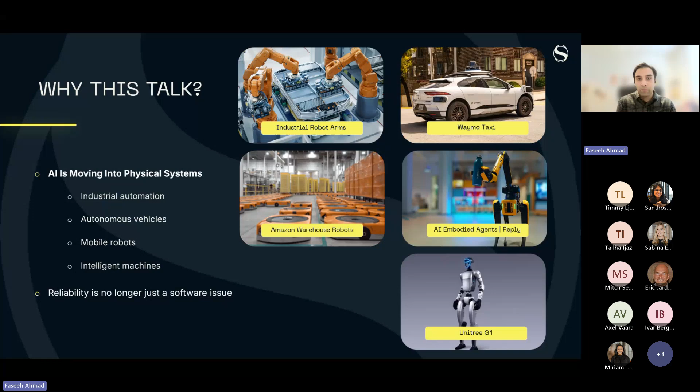Before that, let's try to understand what actually changes when you go from traditional automation toward the AI-driven automation we have right now or are trying to achieve right now.

Before AI, you generally have a structure with three modules. First is inputs, which can be sensors or whatever the user is providing based on task specifications. Then you have a controller, most commonly a PLC controller, that takes these inputs and decides, based on rules defined by the user, to generate control commands. These control commands are then used to control actuators, which could be motors, valves, relays, conveyors, etc. You name it, you're basically doing it.

In most cases you also have a feedback system, which tells you what's happening, and then you can have a closed loop system. The beauty of this system is its deterministic and rule-based control flow—you know exactly what's going in, what's happening, and how you're deciding.

This predictable behavior has an interesting effect: if any failure or edge case happens, you can research it, analyze it, and devise a strategy or a clear validation process, in the form of test scenarios or whatever you want to do. Super nice. But one drawback of this kind of architecture is limited flexibility.

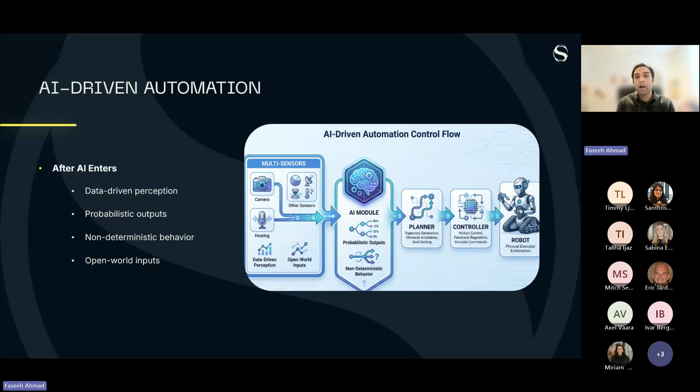And here a lot of things can actually go wrong. For example, there can be a block that's blocking the hole, so you cannot insert the peg in the hole. Or when you try to grasp the peg and insert it in the hole, it actually drops off your hand.

These are small issues. And if your perception system doesn't detect these, you will have problems, because first, you won't be able to achieve the goal you want reliably. Second, you can also endanger the environment you're working in.

One thing I need to mention: these failures are not planning level failures, they're execution level failures. What I mean is that your strategy to solve a particular task doesn't have information on how to deal with these failures, because they only arise when you're actually executing the task. For instance, misplacement of a tool, wrong grasp, or equipment damage.

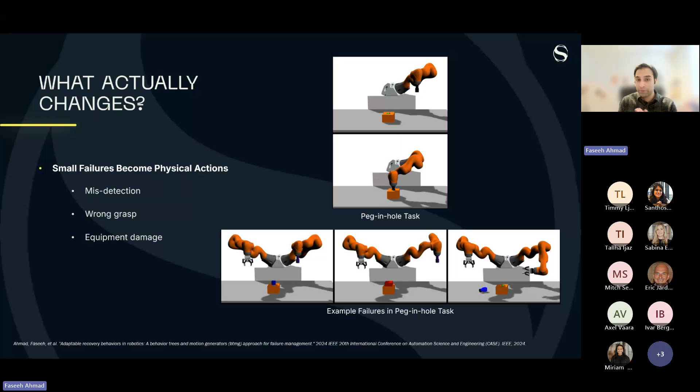And when this happens, you have failures. And failures can be messy. They can have different forms, different shapes, and different results.

So you have partial failures, where you try to grasp the peg, you manage to do that, but since the grasp parameters were not correct, when you were trying to move the peg, it actually falls off your hand, and it can have cascading effects as well.

To understand that, imagine you have a task you want to solve in 10 different steps. But in step number 3, you actually encounter a problem which your system doesn't understand, because the system never imagined this would be a problem.

And the effects of those problems actually arise when you're at, let's say, step number 6 or step number 8. And those effects can carry on to the next parts of the solution or the problem you're solving during the process.

And another issue with these failures is, since it's a very complex system, you have hardware as well as software. In almost all cases, you're not very sure what the clear root cause is.

So either you have wrong parameters, is the peg too slippery, is the grasp force too small, is the hole misplaced, is the lighting condition correct? All these things matter, and they're actually part of why a failure happens. It's not always easy to find out which one is the exact cause.

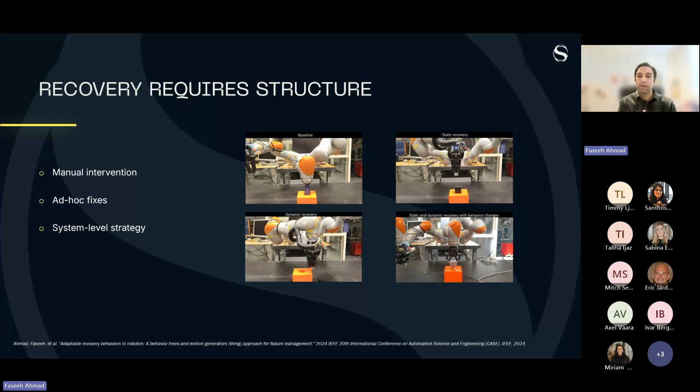And one thing you'll probably notice here is that this is only true if you know such a failure will happen—so kind of like expected failures or known failures.

And now I will show you why AI is super powerful and how we can use it in simplest terms to actually address unknown failures. Here, I will show you a video, which is basically a test run on the ABB YuMi robot.

Here you see this control strategy, which is a behavior tree. To understand it simply, it tells how the robot should solve a problem. Then at the bottom you see some text - this is essentially AI telling what if the failure has happened, what kind of failure it is, and how we resolve this on the fly by fixing the control strategy.

The task we are trying to solve is placing same colored objects into same colored bins. In this instance, the red object is acting as an obstacle because there is no colored bin like that. So the AI understands and devises a solution, fixing the strategy by removing the red object and continuing the execution.

Then in this case, we tried to place the blue object inside the green one because that was the goal. While doing so, the robot actually failed for unknown reasons, which in this case is a human intervening. The AI understands that situation, and now it will try to do the same action again to see if it succeeds.

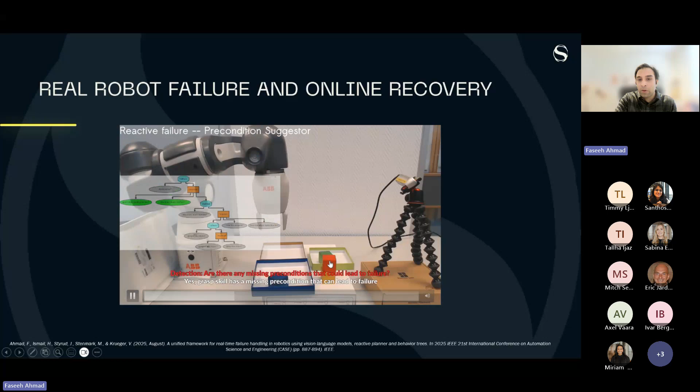Here something interesting happens - the red object is blocking the hole in which the blue object is supposed to be placed, but we cannot pick the red object because the gripper affordance isn't enough. Now the AI needs to understand this and provide a solution for removing this object. In this case, it tells you that you need to do a push action - that's what it's doing.

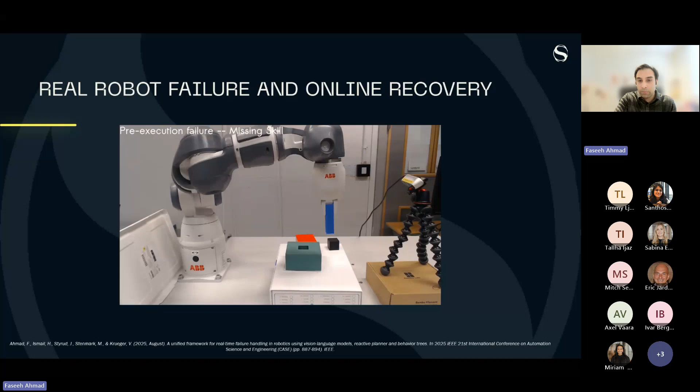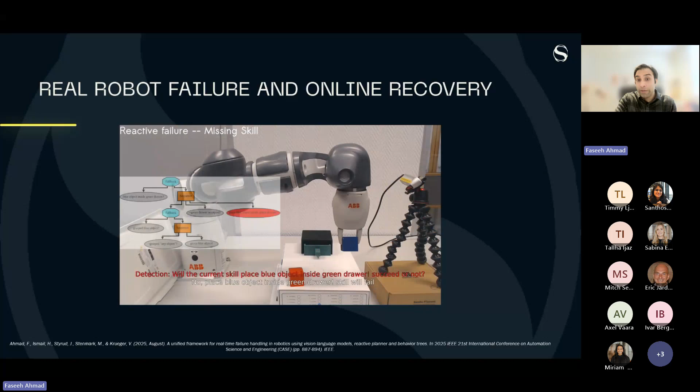And then you do the normal execution. In this case, the goal is to place the blue object inside the green drawer. But when we try to do this, the drawer is closed. So the AI needs to understand the environment as well, and now it needs to open the drawer and continue the execution.

Lastly, we see a very interesting case: when the drawer was closed, our system had no idea the red object was inside the green drawer. But when it opened, new information popped up. So the AI needs to understand that something changed in the environment and adjust our solution accordingly. What it will do is remove the red object and then place the blue object, online, without human intervention.

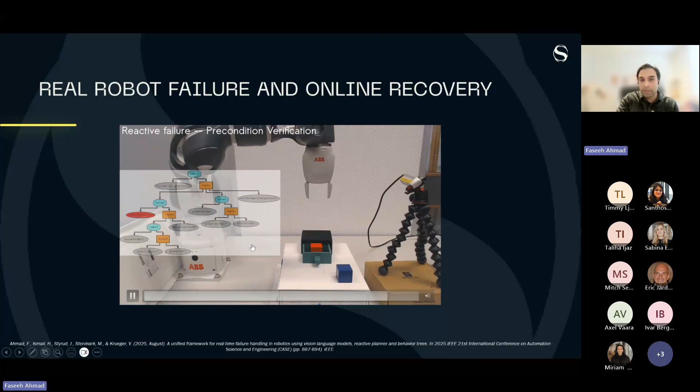I hope this video shows you how powerful this is, but at the same time it also shows that reliability is not something you can achieve directly. Even though AI is controlling the system, there are so many things that can go wrong - maybe the sensor values provided to our AI system are wrong, and then it deduces a wrong solution and implements it, similar to how an AI agent works. An AI agent usually works in software, but in the robot's case this can be a very big problem.

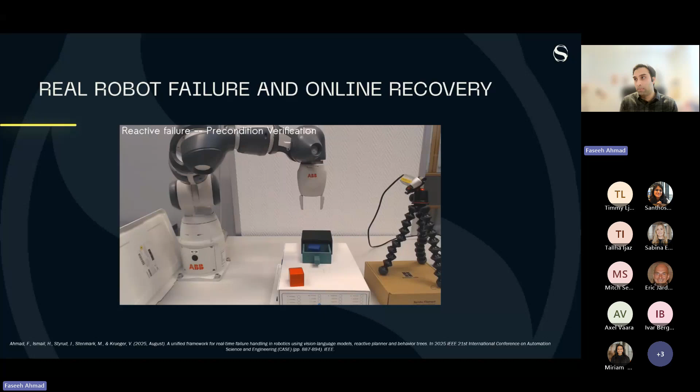So I want to talk about something closely related to reliability and accuracy. Even if you have a model that's 95% accurate, it doesn't mean you have a reliable system overall. To understand that, imagine you have a model trained on a certain dataset, and when you test it you get, say, 95 or even 99% accuracy. Super nice, but that doesn't translate into a super reliable system.

The reason is that the remaining 1% or 5% can have rare edge cases, hidden states, or environmental shifts that are super impactful for the robot, because now you're dealing with a physical environment. Let's assume that 1% had cases where you are supposed to interact with the human itself - if it's failing there, you can even end up hurting the human. And it's not that uncommon, I would say, that it has happened. This results in compounded uncertainty that builds up module to module, and overall you lose the system reliability.

So now talking about, I hope you have understood what changes when we have AI in the system and its effect on physical systems or cyber physical systems. Let's talk about QA now.

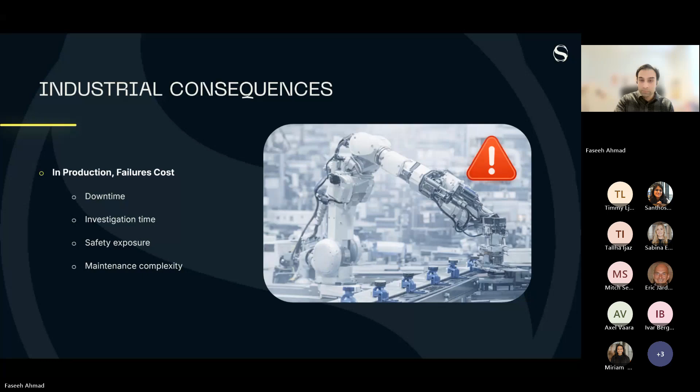Now, before talking about what I have learned and how I see we can address these things based on my limited experience, I also want to address one more thing. The reliability problem is a common problem across different domains in robots, or cyber physical systems.

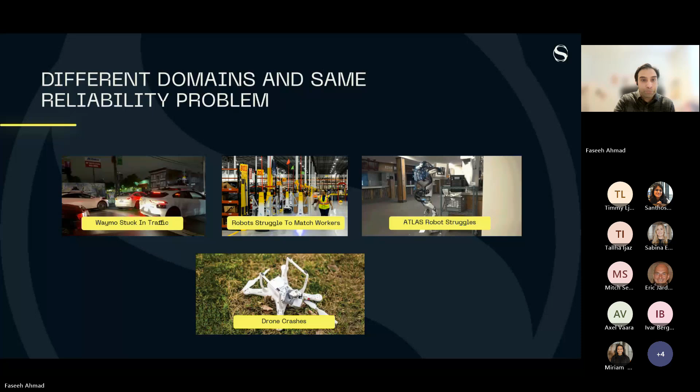So reliability is still a problem, and QA is something required in this context to achieve this kind of reliability. So what are my solutions?

My solution to this problem is to actually work towards reliability from day one. How can you design a reliable system which has these AI-based components?

The first thing we should look into is structuring around your learned components. As mentioned before, these AI components that you use right now—I'm not talking about classical modules—have so many internal modules that basically decide on a certain problem. It's very, very hard, and even infeasible I would say, to write unit tests for all the outputs of those internal AI components. It's infeasible because there are bazillions or trillions of them, actually.

A better way to treat this problem, in my opinion, is to focus on behavior level tests instead of unit tests. By behavior, I mean what is actually expected of the AI system. That expectation comes from the explicit assumptions you make around the AI system. Basically, you need to understand why you place a certain AI module in your system and what is expected out of it. Based on those expectations or requirements, you have to design behavior level or abstract level tests around those AI modules. That's the first thing you should do, and I'd say it's very important.